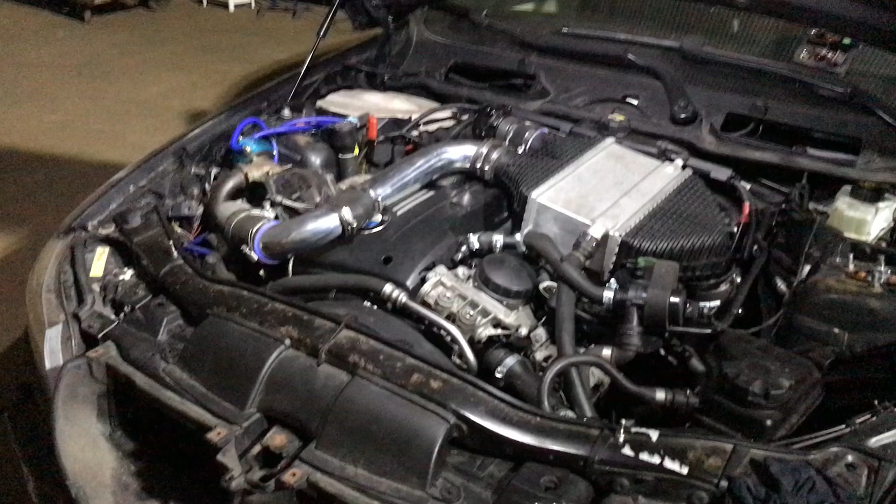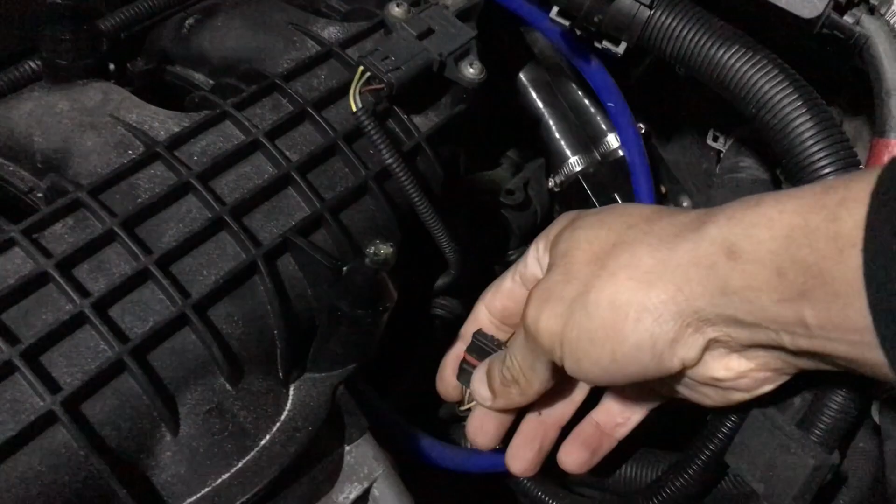Okay guys, as you can see, I just removed the intercooler and now I need to extend this wire. This wire connects on the temperature and manifold air pressure sensor. So yeah, let me extend this, and this should be one thing less to do on this car.

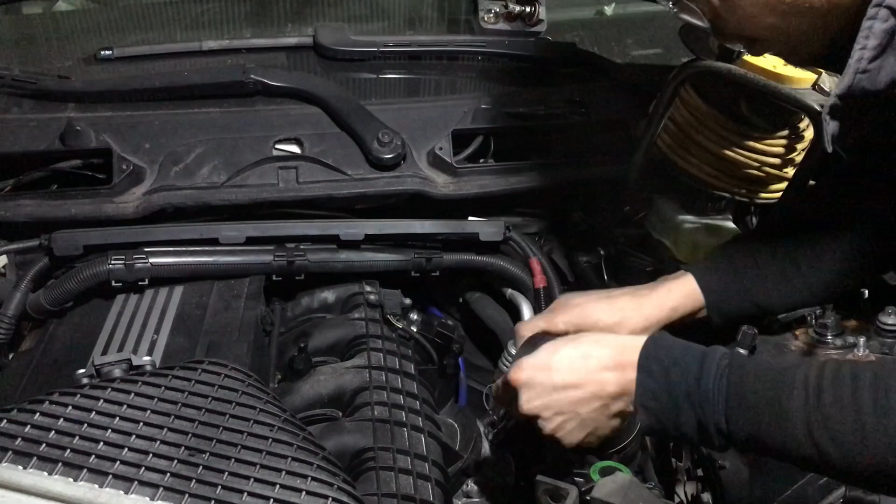Okay, so as you can see here, we extend this wire. Now let's put all this back on the car and let's continue.

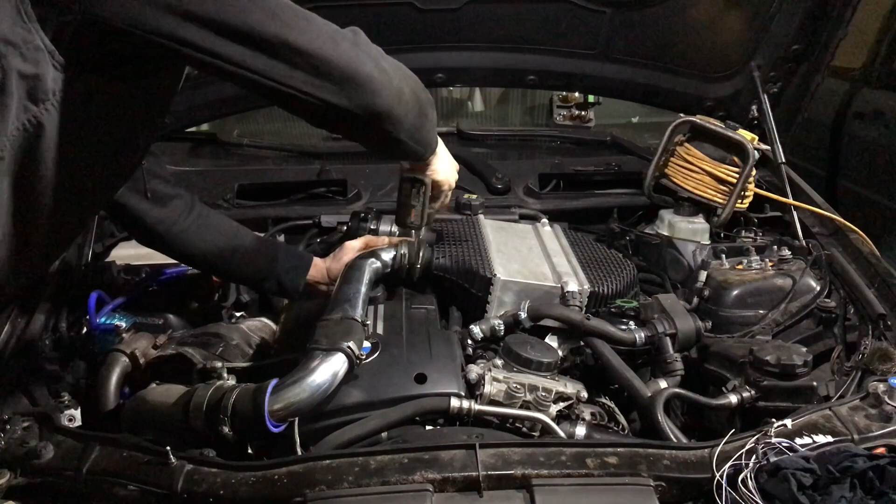Okay, so now guys, we're gonna start this car and see if it runs better. Yeah, let's go.

Okay, as you can see here, we have two connections. Yeah, this is just like the O2 sensor. So now I just need to swap the connection. Let's do it.

So now this thing is done. I just need to rebuild everything, and try. That's it.

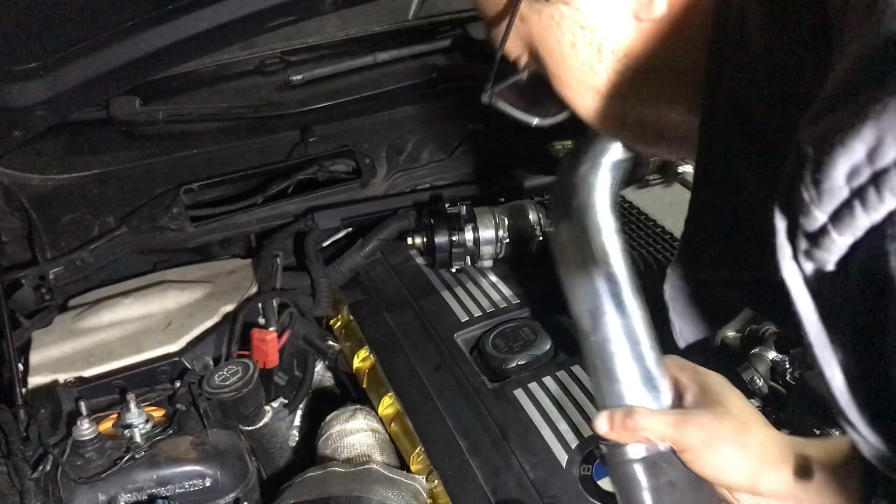Okay, so now guys, if you are not familiar with MHD Flasher, it's the app I use to flash my car with a custom map, or you can do basic stage 2 or stuff like this. So the car was already flashed with my old map, so for now I just need to clear the code.

And now we need to try the car. So yeah, let's start the car.

Okay, so guys, I still have the same fault. I need to continue to investigate off camera and find what the issue is.

But I really need a new tune to make this car 100% better. So yeah guys, I ran on my old map with the air-to-air intercooler setup, so the car needs a new tune. This tool is very good.

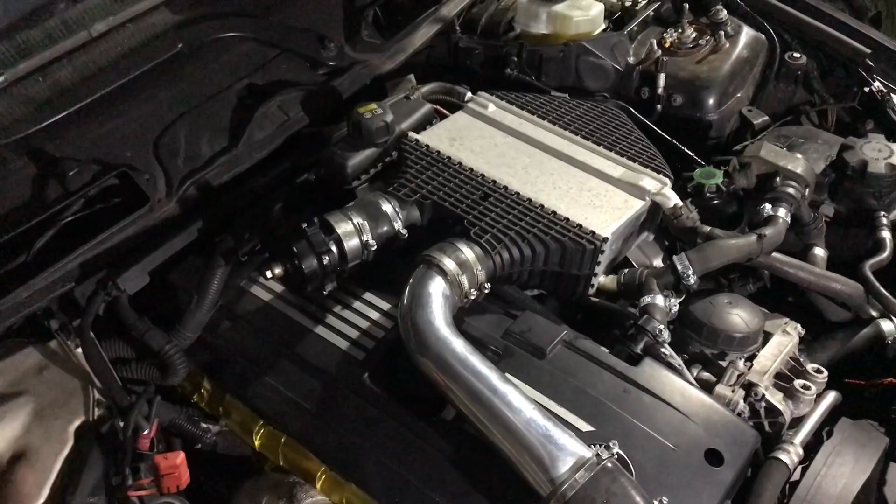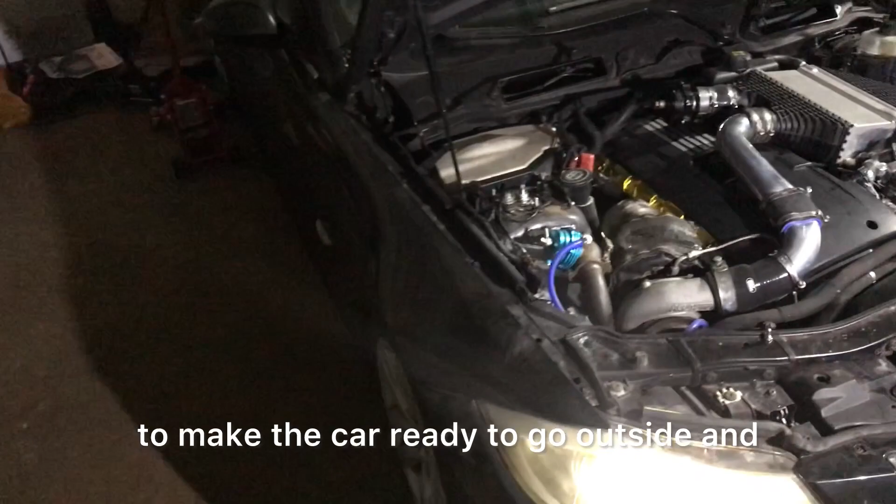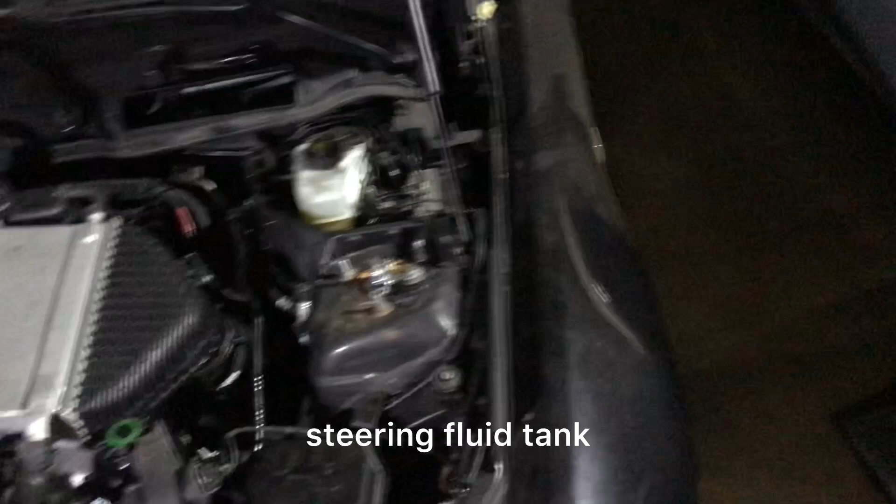Yeah guys, we put some power steering fluid into the power steering fluid tank to have a soft steering now, so it's a bit better. And yeah guys, this car could be ready to drive very soon.

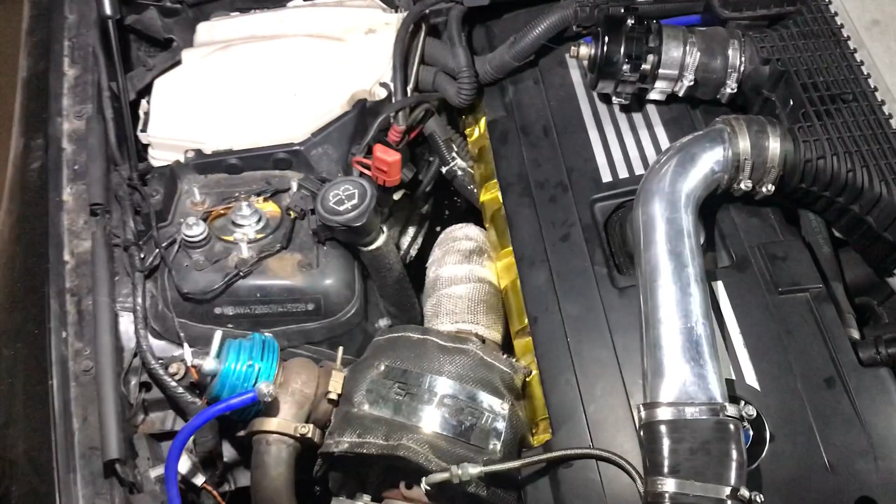Okay, so now guys, I need to show you how to make this pump run when you just put the ignition on. So we have the ground here, the positive here, and what we need to find is positive after ignition. So we need to go into the ECU box just here, and I'll show you in a minute which wire to take.

Okay guys, as you can see here, this connection was clipped like this. So yeah, this orange cable is positive after ignition, so you can use one of these wires to power the water pump just here.

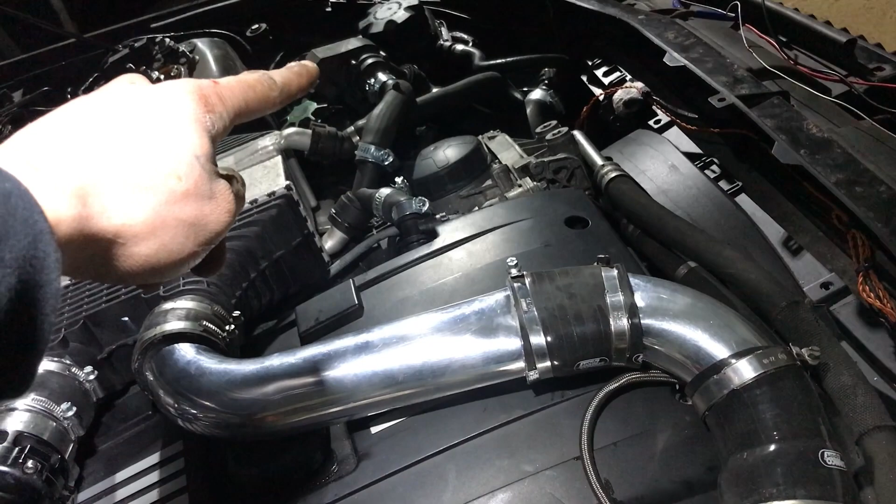So just before I do this, I'm gonna confirm this with the multimeter just here, and confirm if we have voltage after the ignition. So yeah, let's go for this, and then if everything is correct, we can run a wire like this to the water pump. So run the wires from here to this box.

Okay guys, we just confirmed with the multimeter this wire is positive after ignition. So now we're gonna run a cable and give some power to this water pump. Let's do it.

Just make a quick test. I ran a wire here, but it's not very clean, just to test. I extended the wire from here to here, and I took my ground just here on this bolt. So now I'm going to put the ignition on the car and see if the pump runs. No.

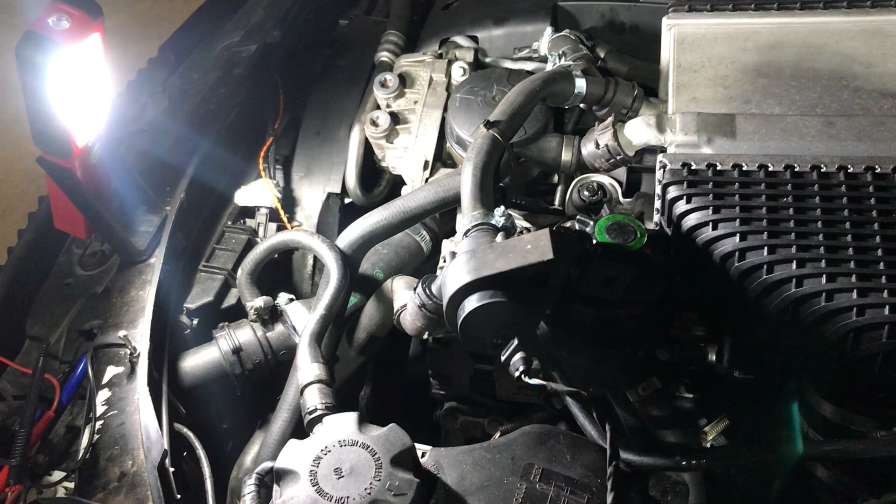Okay guys, the voltage, everything is correct on the car, but this pump is not working, so I need to order a new one from BMW because this one is used. Order a new one and fit this on the car and finish with the engine and stuff like this. And I need another coolant tank as well, I forgot. So just a few things. But yeah, this is real life guys, the thing is not working.

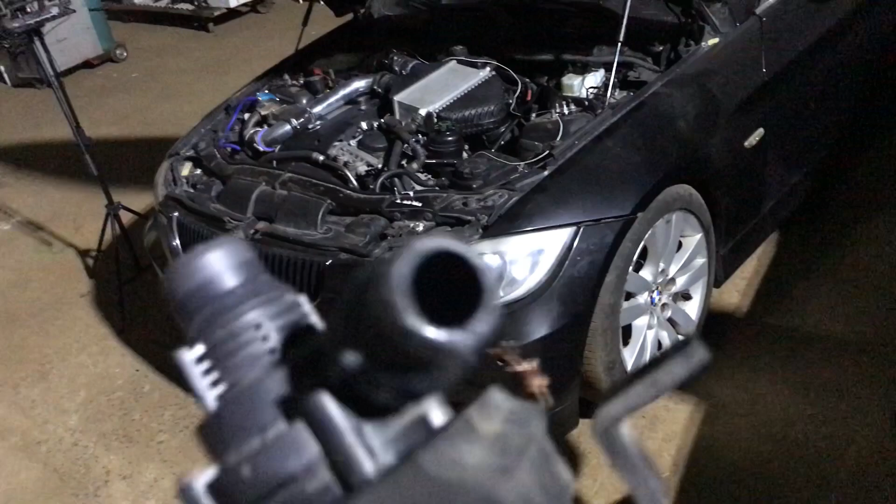Things happen when you do a build like this because it's not a build like bolt-on mods. You know, you need to think about everything, try new things. So that's why the pump is not working. That's the life, just need a new pump and that's it.

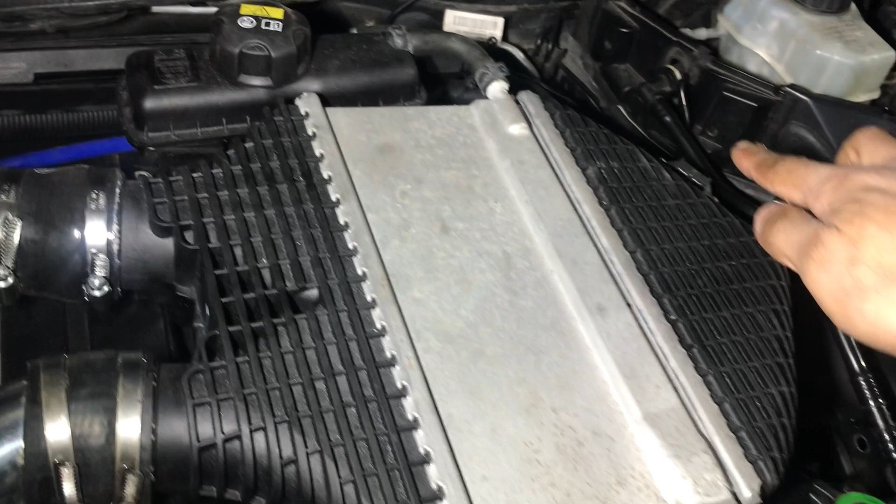Okay guys, as you can see, after a few adjustments the car runs way much better. So I run this wire just here, I run it on this hose just right here, and I make it run all around here to here, and I make this system.

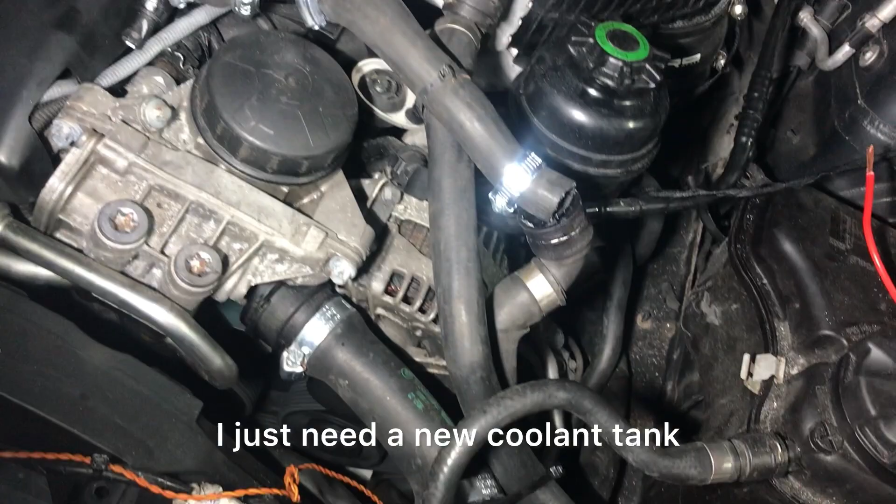We have a fuse holder to protect everything, and I just need a new pump to run, the inlet outlet, to make this setup for the intercooler working, and I just need a new coolant tank. After that, the engine bay work is done.

This is the next thing I'm gonna need guys. I'll keep you updated, and at the moment I just take a bit of time to appreciate how my engine runs very smooth.

I need to adjust these coilovers also because the car is very low on this side. That could be in the next video, guys.

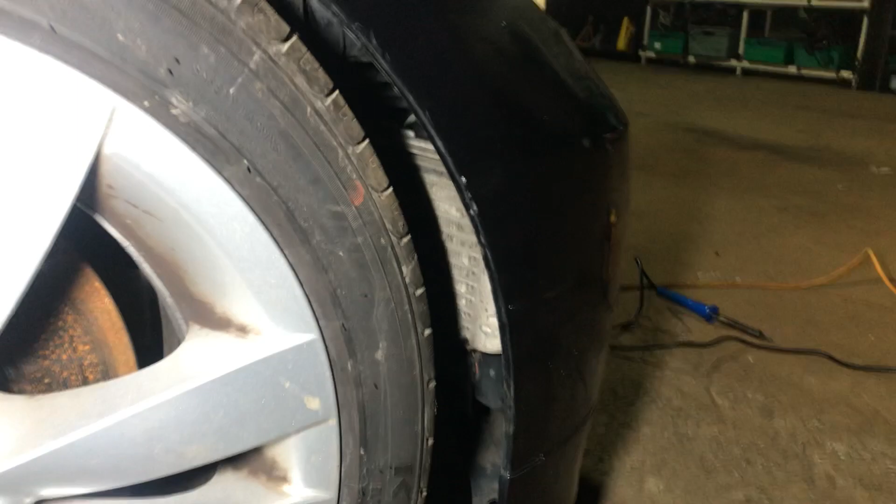I also need to drill some holes because you can see here we have the oil cooler here. And because it's a 320i, we have no hole on this side, so I need to drill some holes here. And after that, fix the bumper.

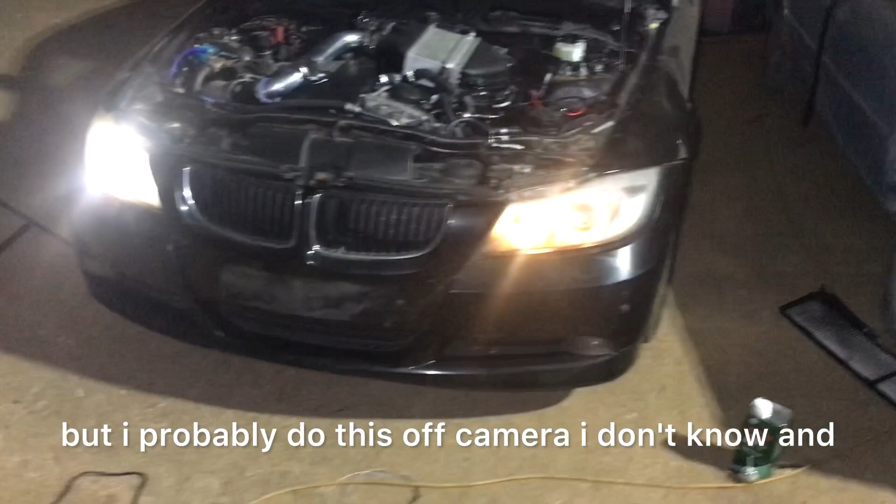So yeah guys, just a few finishing touches, but I'll probably do this off camera, I don't know. And I have a tail light and the boot to change as well. There's just a few things, one bolt here is gone, the xenon bolt. And yeah guys, the car is almost finished.

Okay guys, it's the next day, and today we need to install this. This thing is a two-step module, two-step and no-lift-shift module for any car. It can work on a 335i or any car with manual transmission and a signal for the clutch.

So this is the module. I got this module from Summit in USA, it's my favorite shop, and as you can see it's one of the oldest shops for drag racing and stuff like that.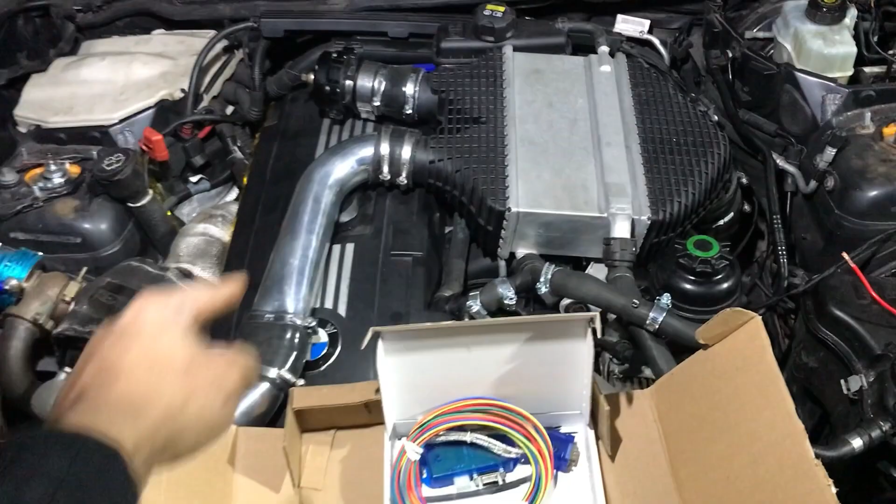We have this pin here for the ground, and this cable here, it's just plug here, and it's just to program the two-step and no-lift-shift. So guys, the first thing I need to do is put my new base map for all this setup, because all the map requests and everything change because of this intercooler and different piping and stuff. So first thing I need to do is change the map, and after that install this. So let's go.

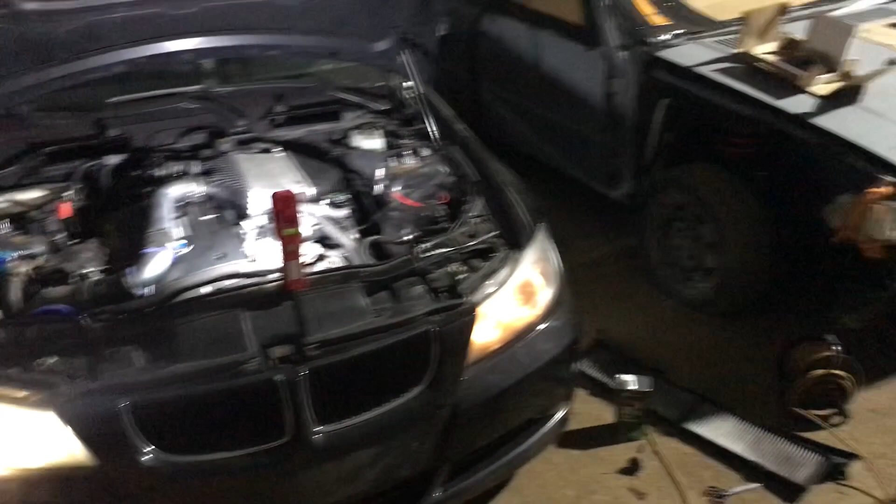Okay, so now the map is installed. I just reset some adaptation because the car was running a bit strange. So now the car runs much better. So now it's time to install this.

The first thing we need to do is remove this cover and remove the complete ECU box just here. So let's do it. Okay, so now we need to unplug all the connections here and remove the ECU.

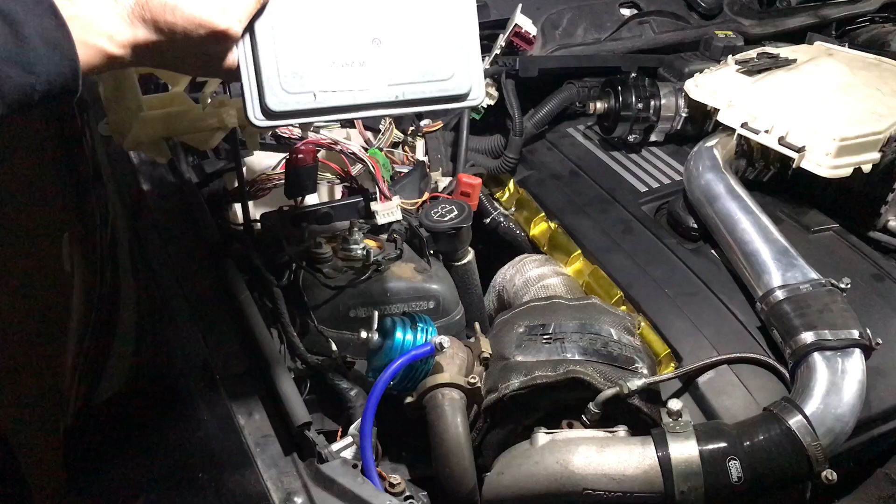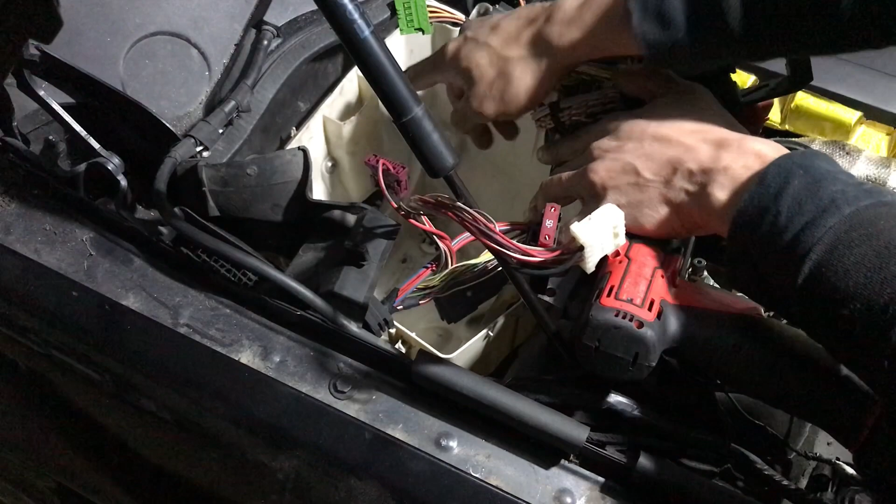Okay, so at this point you can see here we have 4 bolts, it's T30. To remove this box you need to remove these, and just here you can see there is a vent, because this box is air cooled. As you can see on the ECU you have some things - I don't know the name of this thing - but you have this to cool the ECU, and the fan is just there. I'll show you in a minute when I remove this.

Box is removed, and as you can see here, there is the fan to cool all the components into the DME box.

And here you can cut and pass some wires here and here. So this is where I'm gonna run my wires for the two-step module. Let's continue for the rest.

Okay, now we need to remove the glove box. Glove box is there, so I need to clean a bit and remove the glove box.

As you can see, we have a bit more room now. These 2 wires just there are for my boost controller.

I think I need to use the same way to pass the wires for my module. I'm still thinking what is best for now, but I think I'm gonna do this.

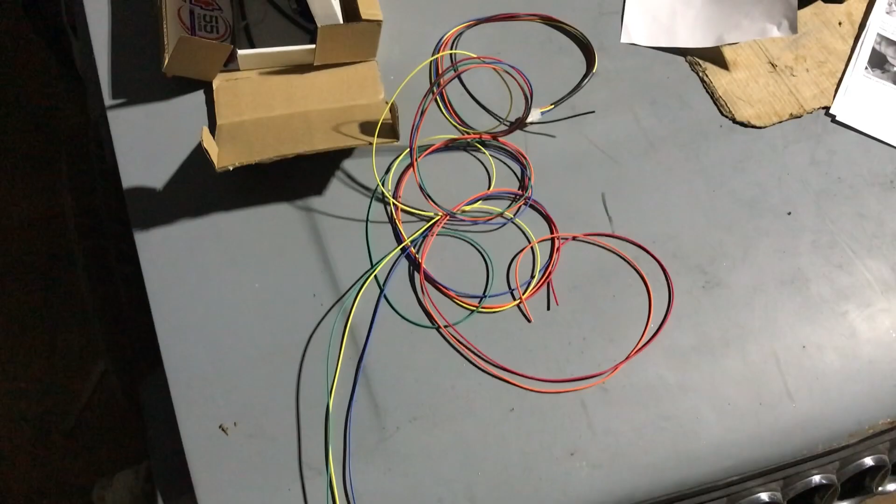Okay guys, all of this is the harness for the two-step module. So first thing first, the green wires are the clutch signal wires, the yellow wires just here are the RPM wires, just to see the speed of the engine, the RPM.

And the blue one is the gas pedal signal. We need to tap this and connect it into the connector of the DME on the following pin for the gas pedal. This one is the RPM, and this one, the clutch signal, is for the flat shift and everything.

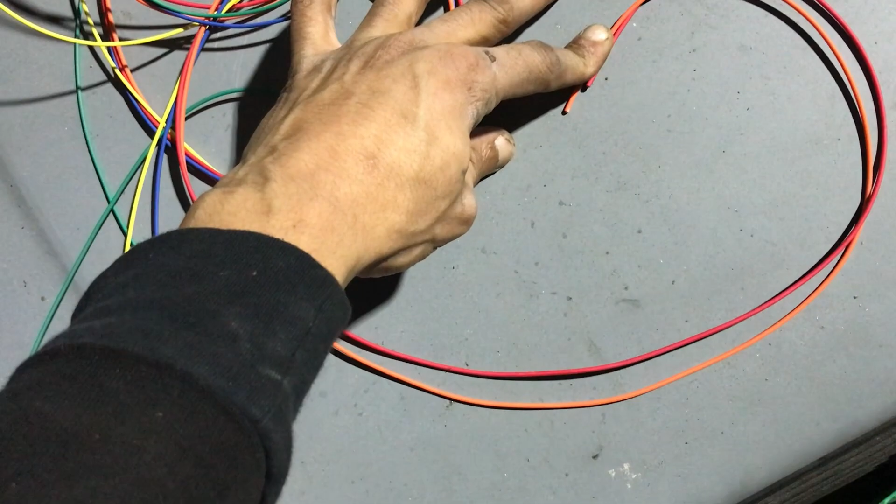And these 2 wires just here we need to connect into the orange wires, which is the positive after ignition - the wire we use for the small water pump for the intercooler. We need to reuse the same wire, and this very short black wire is simply the ground. So we need to install this into the car.

And yeah, all these wires go to the engine bay. Let's pass these wires. So finally I decide to only put the 3 signal wires here, and these 2, ignition and the ground, I'm gonna connect from inside.

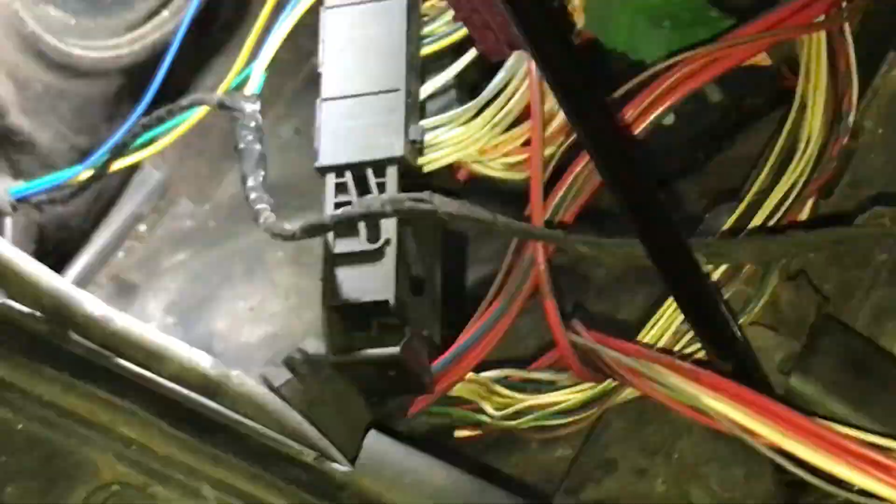Okay, so I decide to choose this spot for the module. Now I need to continue to run all the wires and put the power on this, the orange, red, and black wires. Let's continue.

Okay, so everything is complete here. I just make a small hole in here, and I run the wires for the module.

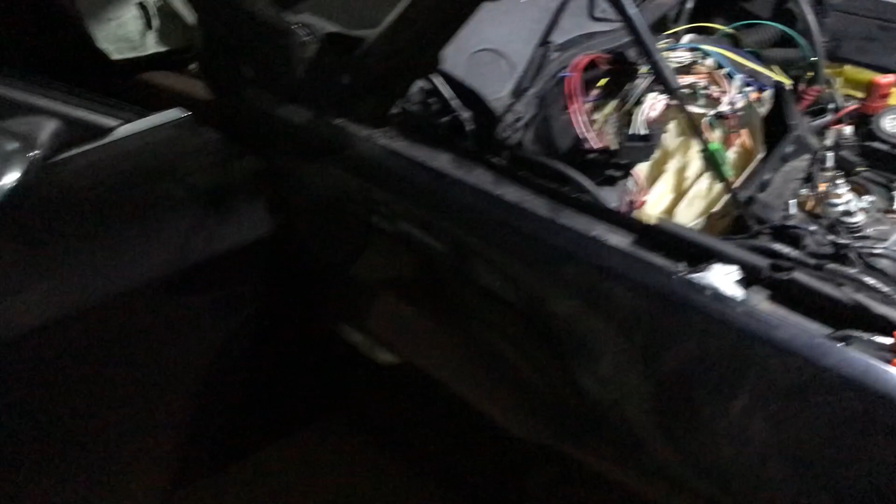So the next step is to connect this to one of these 2 connectors. I need to look at the wiring diagram and select the good wires, but at the moment I need to rebuild all the interior and everything here, and after that I'm gonna have a look for the pins and stuff like that, the connections.

Okay guys, so now I'm gonna use my computer with my chassis number to have a look on the wiring diagrams to connect all the wires in the car: the clutch signal, RPM signal, and the throttle body signal.

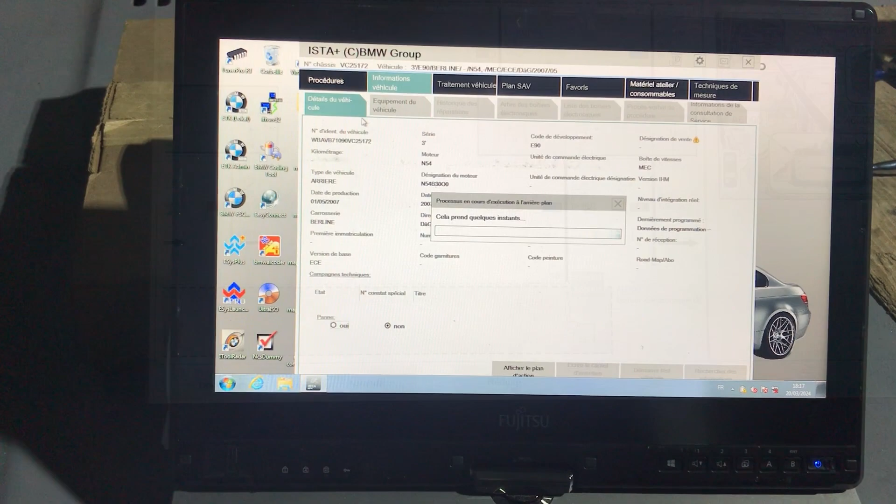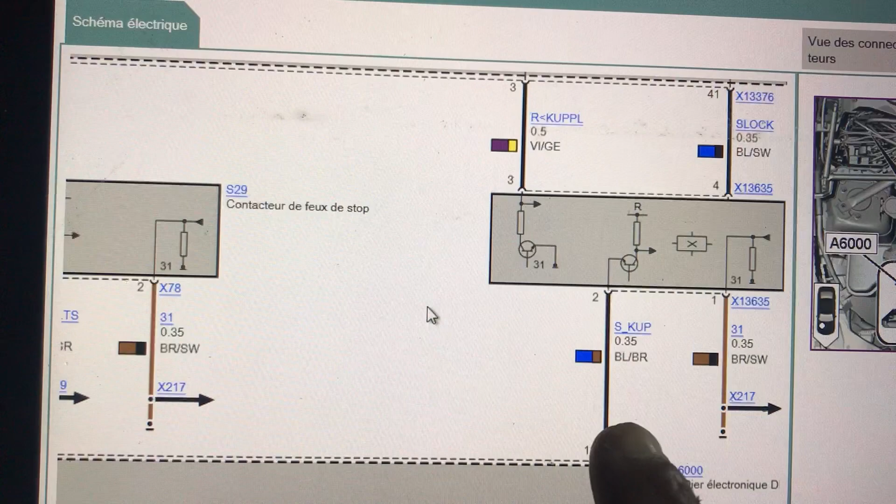Okay, so the first signal is the clutch signal. This is the clutch position sensor, it's basically a Hall sensor. So you have 4 wires, and I need to take the signal from this wire. This is the connection on the DME, and I need to connect the green wire from the 2-step module to this signal to have the clutch signal. So this is the first one.

So the wire is blue and brown on pin 18, and this is the name of the connector, and this connector is here, on this small part of the connector. I'm gonna show you after in a minute.

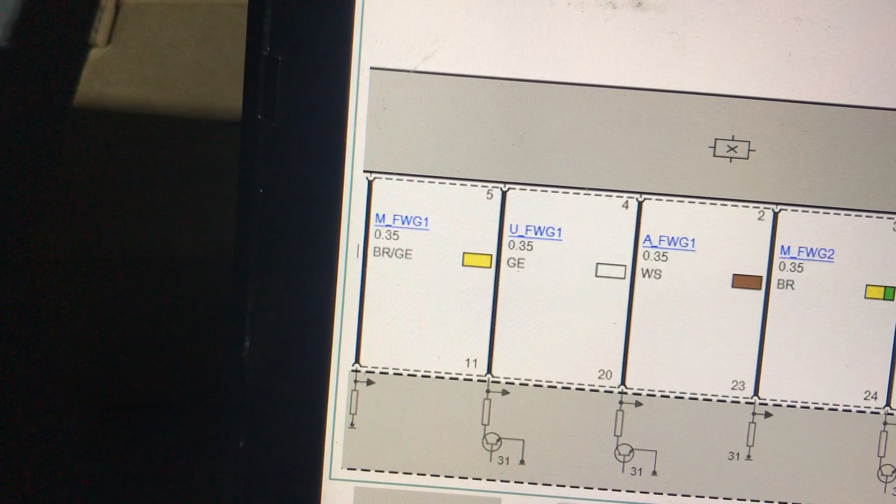And after that I need the throttle body - not the throttle body, the accelerator pedal sensor. So one of these sensors of this wire, I need to double check after. But yeah, let's connect this one first. So pin 18, and pin 18 on this one. Let's do it.

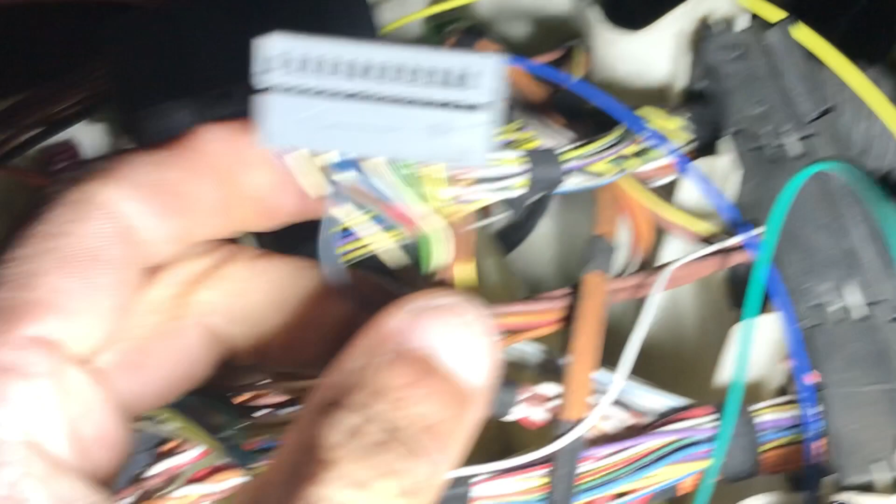Okay, so guys, this is the connector. As you can see on the picture, it was here, and this is the connector itself. As you can see here, or probably not, but here it's number 14 and here number 25 or 26, something like this, and we need pin 18.

So 14, 15, 16, 17, 18 - this wire just here. So yeah guys, to remove the pin, it's very simple. You can see here we have the wires we need. We just need to press here.

Press another time, and that's it. So now I need to connect the green wire to this one, and after that we clip the pin. That's it.

Okay, so guys, the next wire. So now I just connect this way. I need to make the solder after.

So the next wire is the accelerator signal. It's pin number 7, still on the same connector. 1, 2, 3, 4, 5, 6, 7. So it's this wire just here, the white and yellow. Same thing, I'm gonna remove the pin and attach the wire, and that's it.

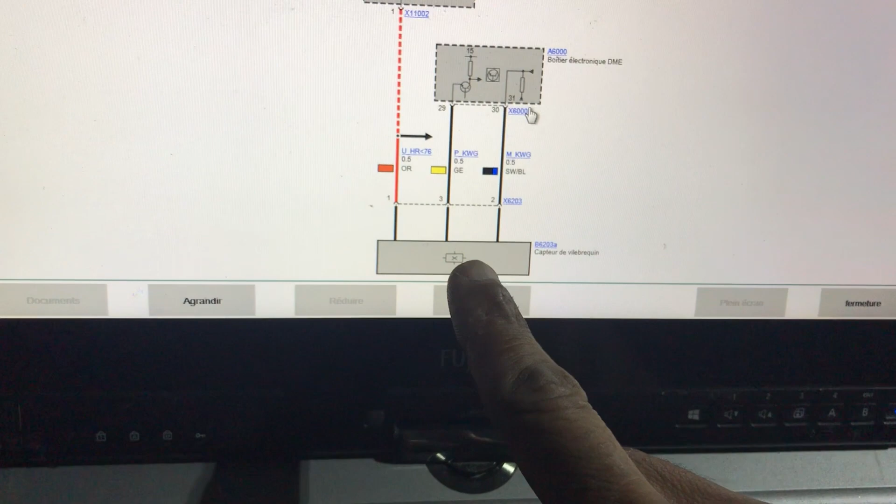This is the RPM sensor, and this is the DME. So I need to connect myself the yellow wires with the yellow wires of the module, pin 29 on this connector. Let's have a look.

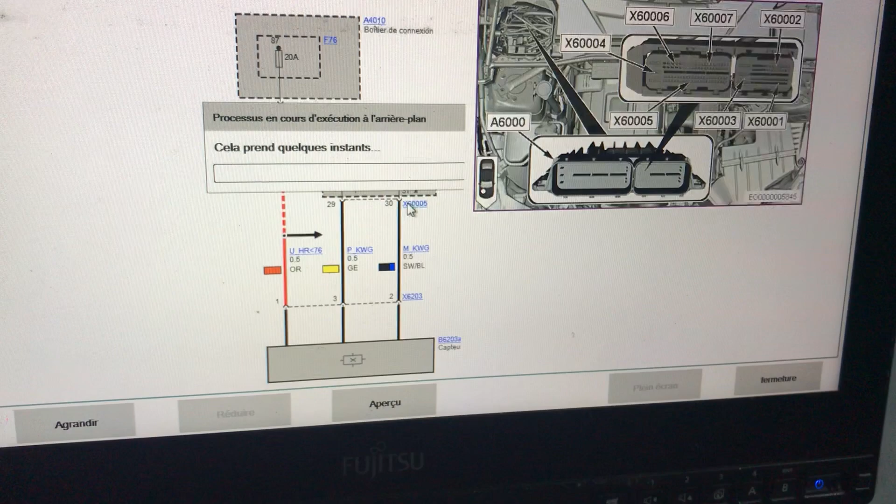Okay, so 05 is okay, the bottom one. I think this one is a black connector, a long black connector. So okay, this one and pin 29. Let's find this wire, and okay, so I was right, it's the black connector just here. Because it's on the bottom, number 5 is there. So yeah, let's remove the connector and have a look.

Okay, so guys, this is the connector just here, and now we need to take number 29 because I see on the wiring diagram the wire is yellow. I think it's this one, but I need to confirm. 23, 24, 25, 26, 27, 28, 29.

Okay, so as I showed you a few times before, you need to press here, then pull the wire out, and push another time here for the second time, and then the wire is completely free. So let me remove this wire, and then I can connect the last wire from the module just here.

Yeah, so now we are inside and we need to connect the last wires, so the ground and the two positives.

So this is the harness for the module just here, and yeah, I just reconnect everything here. Don't worry that this is very ugly, but I connected a lot of wires on the positive and on the ground as well, because my homemade boost controller is wired to this one, and this thing is protected by a fuse. No worries for that.

So guys, let's rebuild everything. It's not finished, but in the next video I'm gonna show you how to program this module. So yeah, let's reinstall this and I'll conclude after.

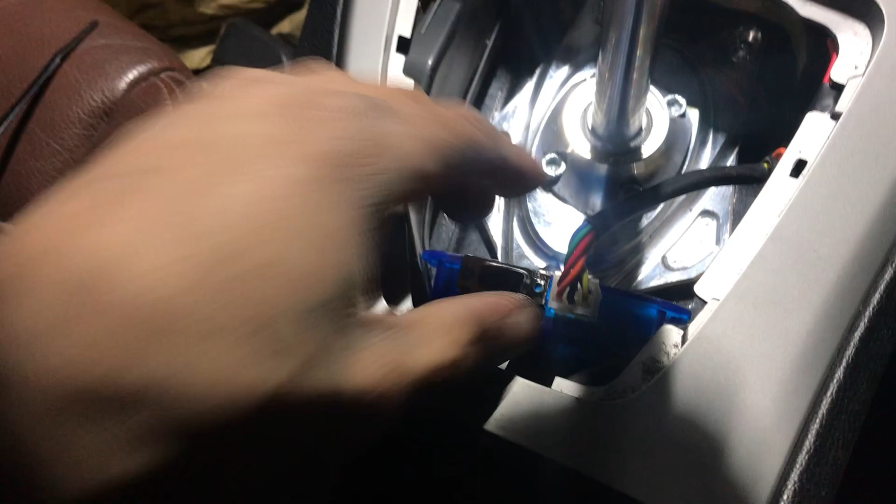Okay, so guys, as you can see here, the module is there. It's not fixed, but it's here, and now I'm gonna show you with the ignition.

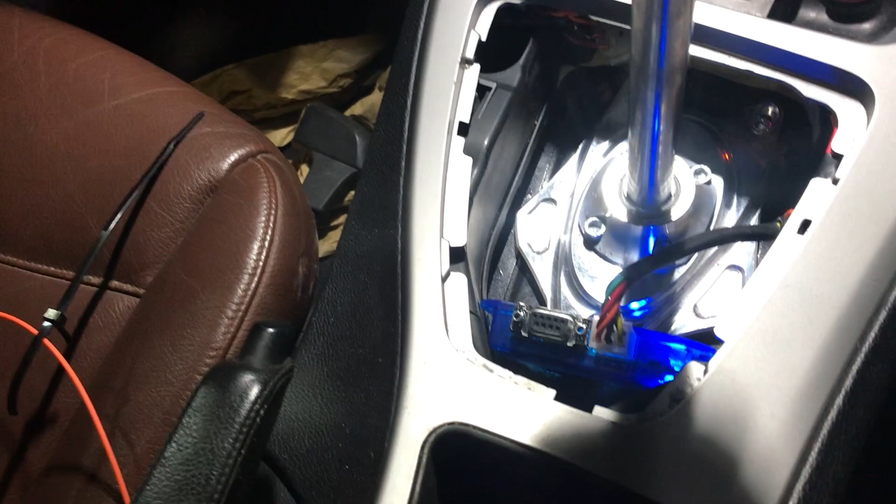Ignition is on, and when I press, yeah, if I switch on here, I'm gonna turn on my homemade boost controller.

So yeah, guys, in the next episode I'm gonna show you how to program this module, and yeah, that's it.